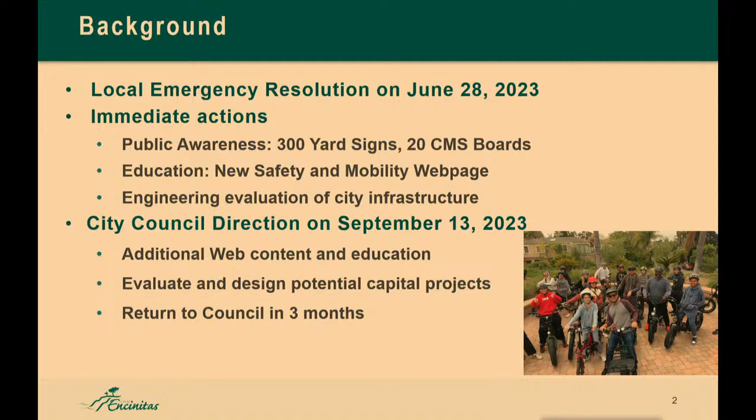In September last year, City Council reviewed what we had done and provided us some new direction: additional web content, evaluating additional capital project options, and gave us 3 months to evaluate these options and do a preliminary design and come to council for potential implementation. This was the list initially presented to City Council, various projects identified when we did a quick sweep of the city's bicycle infrastructure to see what we can do at different locations with different types of improvements. Majority of these are in the vicinity of schools.

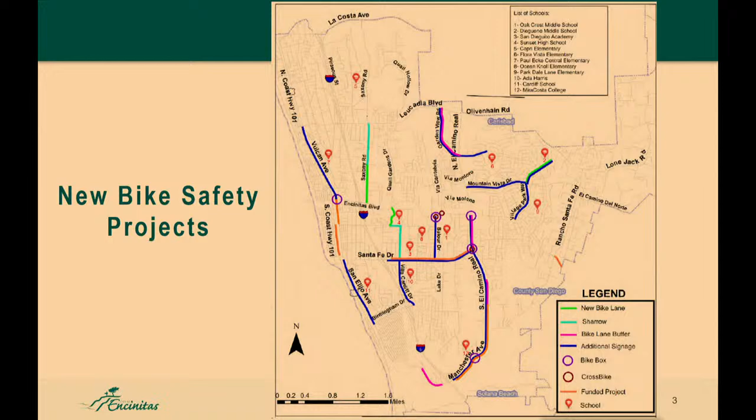Different categories of projects: there were new Class 2 bike lanes identified. There were some streets that had the potential to add new bike lanes, such as Saxony, Westlake, Village Park Way, between the two bounds you can see on the slide. As an example, these were attached to the council report, different designs for each of these roadway segments. A sample, Village Park Way, this is how it looks now—as you can see, very wide travel lanes.

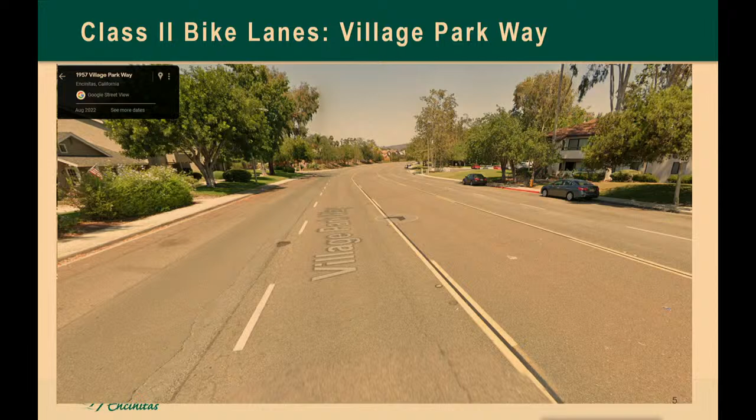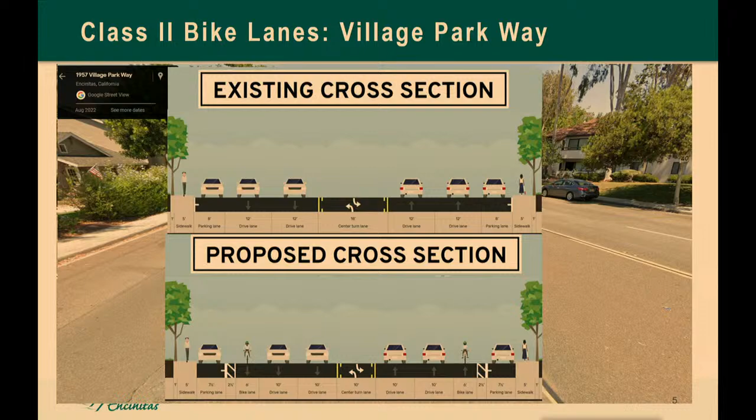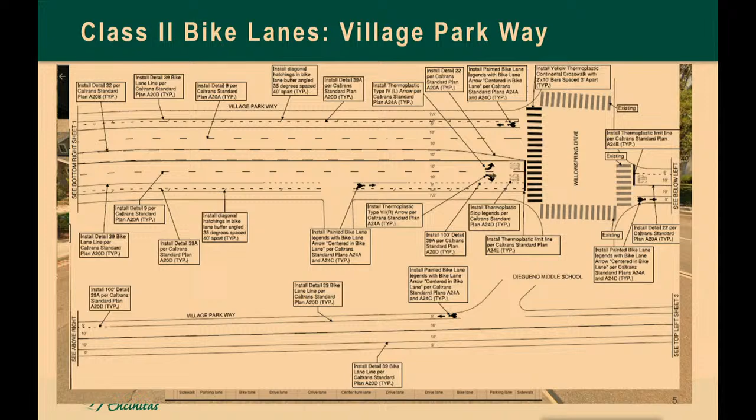When we came to council, we presented a sample cross-section that can narrow down the lanes and add a bike lane and a buffer while still keeping the parking lane. This was blessed, and this is the new design, part of what we will be implementing, obviously pending council approval tonight, and similarly at other locations.

This was another measure we initially proposed to council: a two-stage bike box that would help safer left turns for bicyclists. Locations were identified initially to implement an enhanced left turn for bicyclists—various intersections we thought this could be beneficial to. However, after multiple meetings with Bike Walk Encinitas, and research on examples in other cities and regions, we would like to test this, if council blesses it, at only one location to see how it works out.

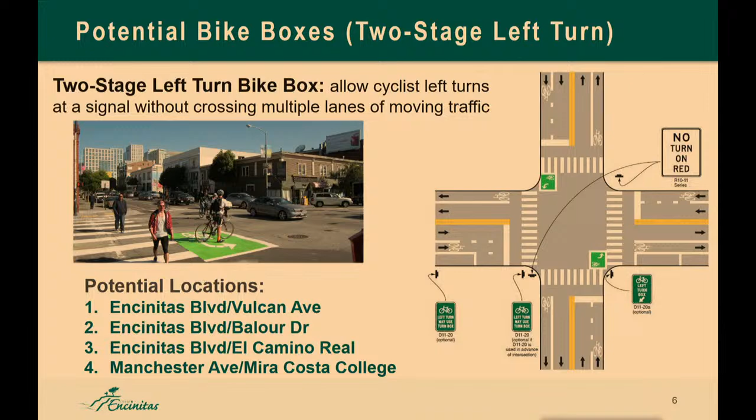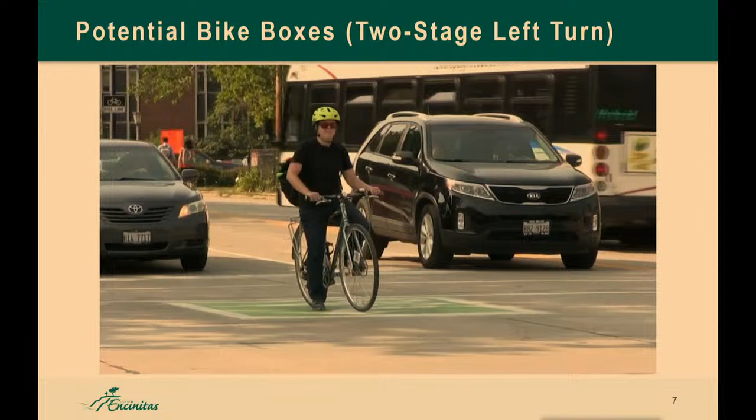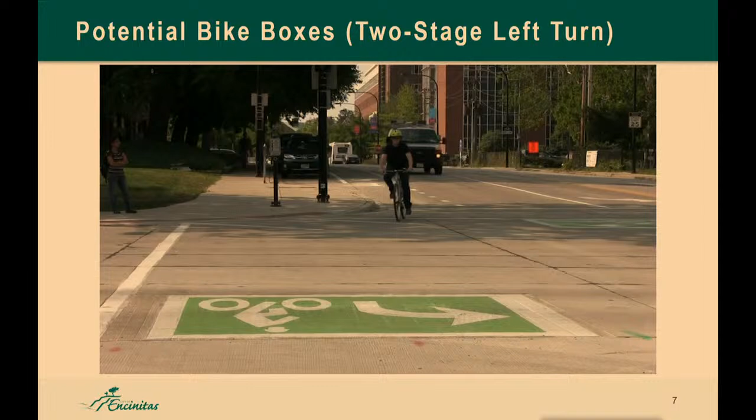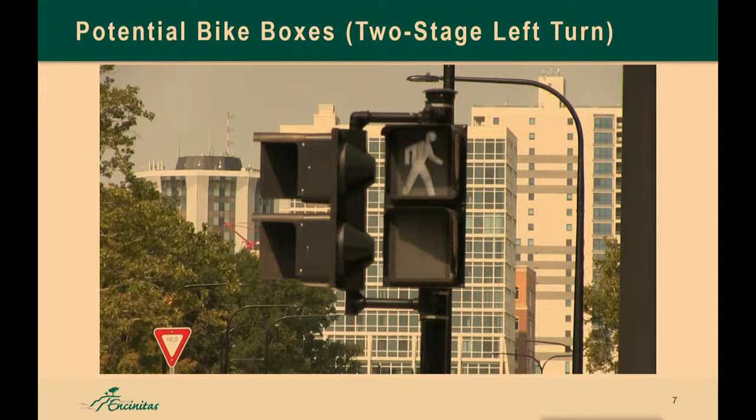A short video shows how these two-stage bike boxes operate. Two-stage left turn boxes provide an easy, safe way for people on bikes to make left turns on busier streets. They are painted green boxes on the pavement where you can wait out of the path of traffic to complete your left turn. To use the box, if you're riding a bike and want to make a left turn, on a green light you should go straight through the intersection and into the box. Turn your bike to the left, then wait for the light to turn green or wait for the all-walk signal and ride through the intersection. If you use the all-walk signal, please be sure to yield to pedestrians.

Two-stage left. The reason it's called two stages: you follow the vehicles with their green, you don't turn left where you intend to go. You continue and cross the intersection. On the other side, you stay on this green box and wait for the vehicles in the opposite direction, then you follow them, parallel to them, to your originally intended direction. That's why it's called two-stage.

Out of the different intersections, there are concerns that have to be mentioned. The most concern is wherever you add a bike box, a two-stage bike box, you have to eliminate the right turn. This is the location that we thought might be a good location for a pilot, Encinitas on Vulcan. This is for northbound left turn bikers.

So if a biker is coming from City Hall, northbound, they get to the intersection and want to turn left toward 101, they would have to cross the intersection, go to the northeast corner with the green for northbound Vulcan. Then they wait here for westbound Encinitas Boulevard, and when westbound Encinitas Boulevard gets its green, they continue going west.

Now what happens is because of the location of this box, the westbound free right turn would be eliminated. So vehicles that are westbound, if this is implemented, there will be a no turn on red for the westbound right turn, which would have some impacts.

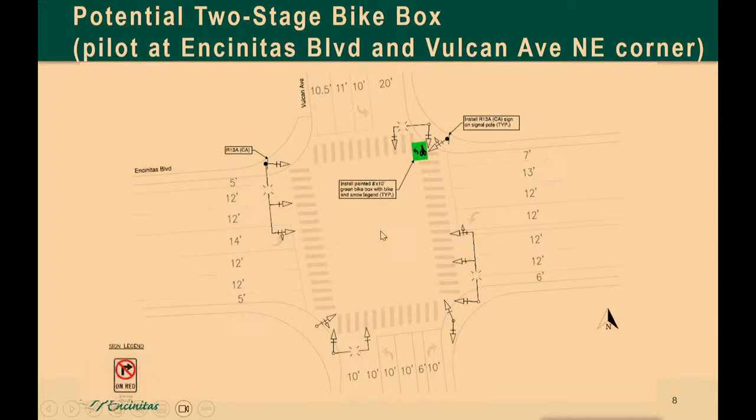So when they're waiting, they are waiting on the pavement in an unprotected area. The design can be made in a way that there's minimal or absolutely no conflict between the vehicles and bicyclists as they're waiting, but any kind of mistake that happens by any bicyclist or a vehicle can put the bicyclist in an unwanted situation.

But as said, this is only one location that we think we can implement a pilot. We are asking council to let us, if it is to be done, leave the other locations for now for a future date.

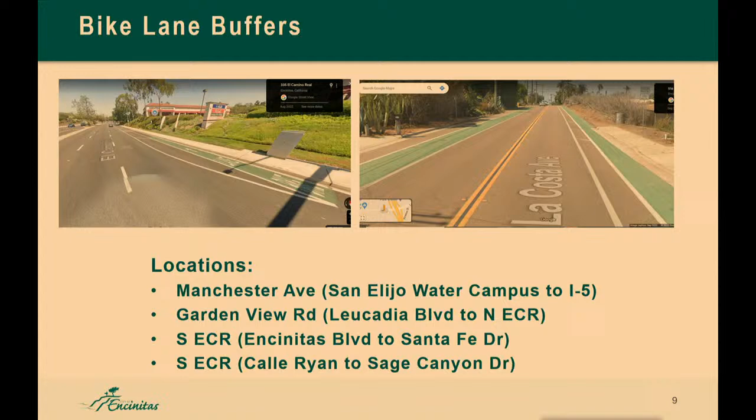Another category of projects: bike lane buffers, simple narrowing down of travel lanes, addition of a buffer where there's just a bike lane now with no existing buffer. Various locations: Manchester, Garden View, El Camino Real. Another example, Garden View right now has relatively wide lanes, bike lane with no buffer.

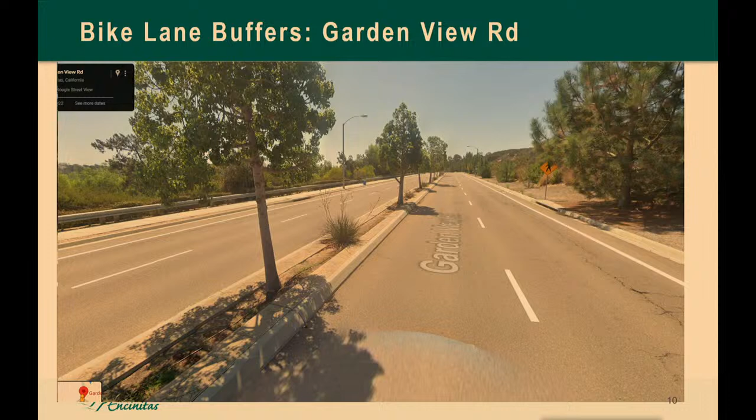We presented this cross section, narrower lanes with a new added buffer, and this is the design that we presented to council. There are similar designs for other roadways too.

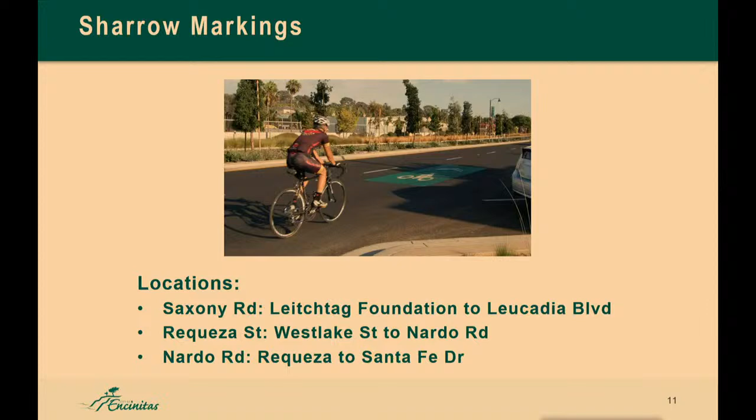Sharrow markings: implementation of sharrows at locations where we don't have enough room to add a dedicated bike lane, but we have enough bicycling activity, or it's in the vicinity of a school or somewhere we felt it can be beneficial to add sharrows. It does meet our sharrow policy, which will be presented to council at a later item tonight.

Bicyclists would have their own dedicated path. They don't need to use the crosswalk, because in a crosswalk they have to walk their bike, but in a cross bike they can just continue riding their bike.

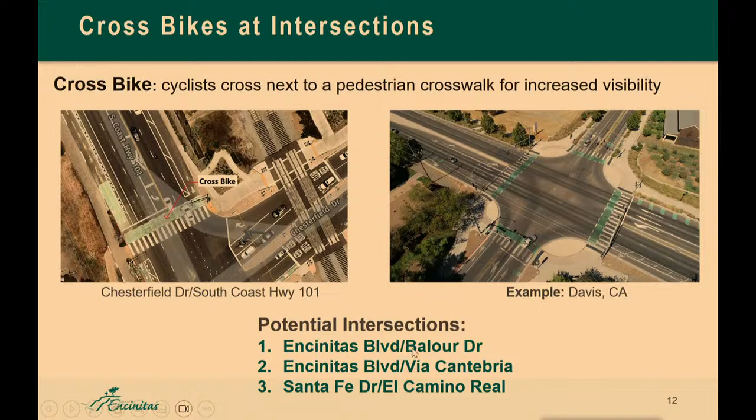Another example on the right in the City of Davis. So these are three locations where we can implement these. This one is another example at the intersection of Balour and westbound Encinitas Boulevard.

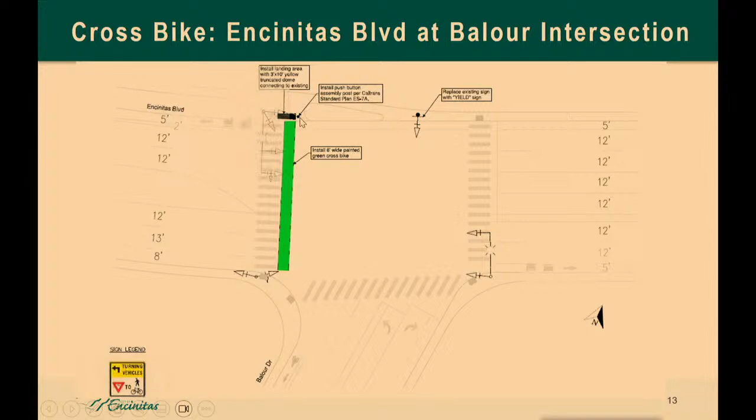If they want to go toward Oakcrest or inside Balour, turn westbound left turn, they'd be able to get out of the travel way. There is a landing area, and a push button for bicyclists.

So this is the existing crosswalk. The cross bike would basically go here, and they'll have a landing. There will be a curb cut on the north side, where they'll wait with a new push button, and they'll be able to cross.

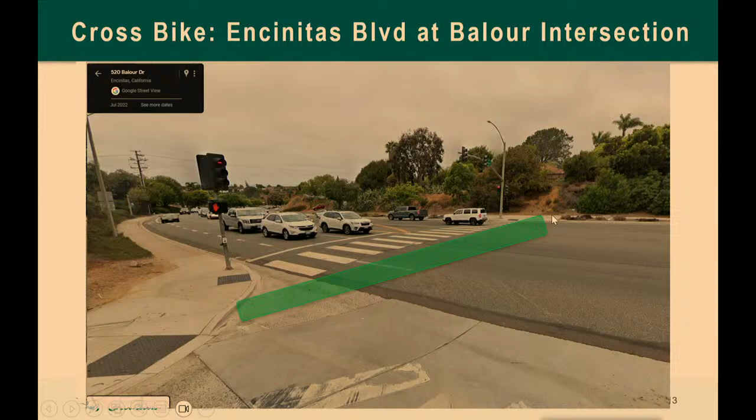Additional signage around the schools, and different roadways that can benefit from additional signage.

It's not very aesthetically pleasing per se, but compared to the slurry option, it's a lot less cost prohibitive, I would say. Slurry, obviously, is a clean slate, a clean canvas - the roadway would look a lot better and will add to the life of the road.

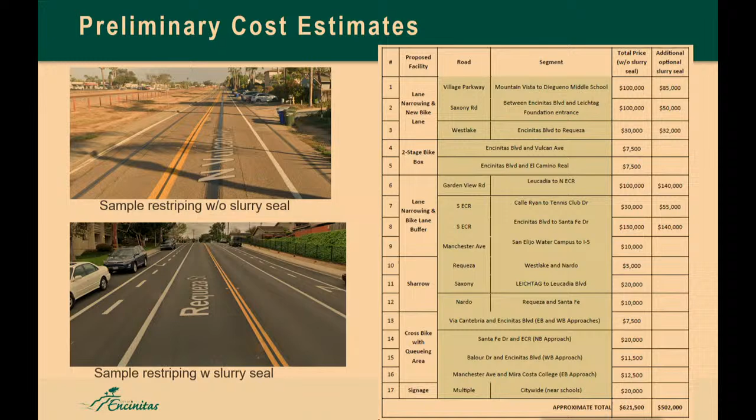One thing that should be noted is that for all these improvements, we will work with our mobility manager to add the educational component that is needed. Many of these - the buffers, people are familiar with what they are, new bike lanes, people know - but there are new features here. If we do the two-stage crossings, the cross bikes, all these additional elements we're introducing, we'll make sure we do as much as we can for our educational campaign, so our students, our residents, everybody basically knows how to utilize these potential new facilities.

Thank you, I'm open to questions. Okay, very good, appreciate the presentation. Does the council have any preliminary questions before we hear from the public?

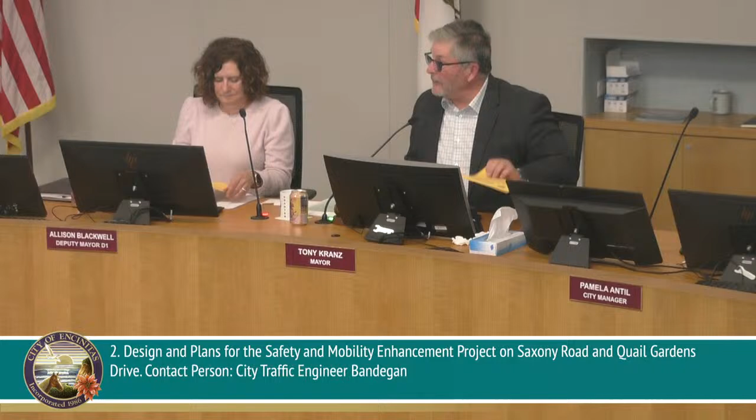And once again, we have our city traffic engineer. Really, this night is all about our city traffic engineer, Abe. Not just me, Mayor, thank you for your support on the previous item. My name was mentioned a few times. I do want to use the opportunity to give a kudos to our staff.

One reason we have the money to do this is that we saved easily $300,000 to $500,000 just for the design. When I mentioned in September that we'll take care of this in-house, everybody was surprised. Obviously, Jill supported us, letting us go a little slower on the other stuff, but our staff, Ian Barr is here, one of our staff, two other engineers of ours, they did a great job designing all of this. If we had to hire a consultant, it would take us three months to hire a consultant, let alone the $500,000 we would have to spend on just design. So smart, they took everything in-house, share that credit. Yes, sir, good job, appreciate everybody.

The second one, safety and mobility enhancements on Quail and Saxony Road. A little bit of history on this. We have various land uses there along these two corridors: residential, recreational, commercial. We have the Y, we have the Ecke Ranch, the medical center. We have future development coming up, mostly on Quail. We received numerous requests from the residents of the two corridors over the past two years for traffic calming and traffic management. We did conduct an analysis and evaluated the two corridors. It was presented to the Mobility and Traffic Safety Commission in April last year. Saxony was presented in June of last year. The fact that City Council's 23-24 strategic planning framework includes prioritization for safety and complete streets on these two corridors, we did decide to bring these to council for future direction.

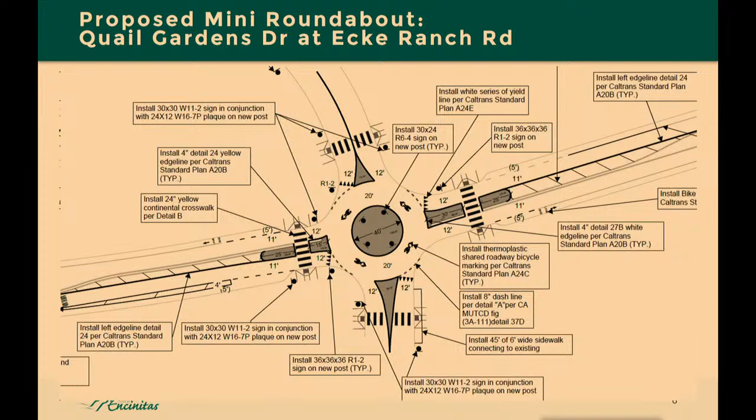Another element was the interim stop sign at the Kristen Court intersection, in anticipation of a future development project building a traffic signal at their main entrance. There are also other options currently under consideration to see if we can fit a mini roundabout here too, to be more consistent along the corridor, but that depends on the development project.

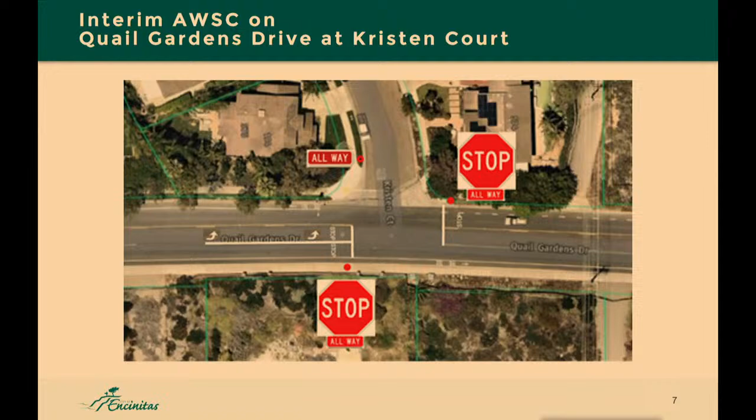At this time, this is a stop sign that was directed by council as an interim measure, and we are implementing it with this project.

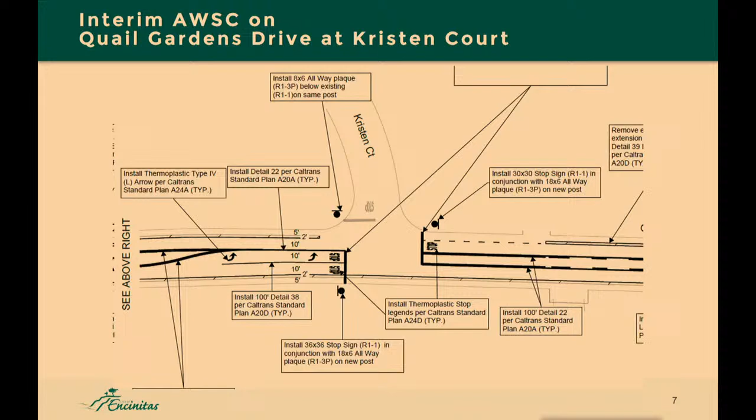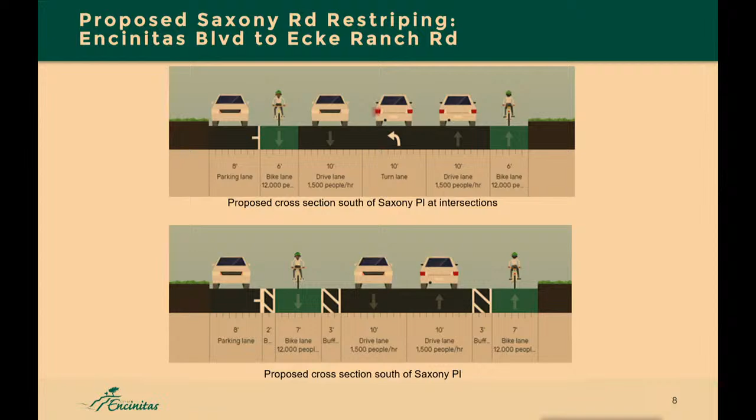As you can see, there are buffers for the bike lane. South of Ecke Ranch Road, by the Y, on Saxony we have a wider cross section with multiple travel lanes and parking. We looked at it objectively to see if we could fit a new bike lane with buffers, and this cross section was supported by council and we were able to implement it within the existing lane width.

This is just one sample right south of the Y entrance. We're adding bike lanes and narrowing down the lanes, adding a pocket to enter the Y.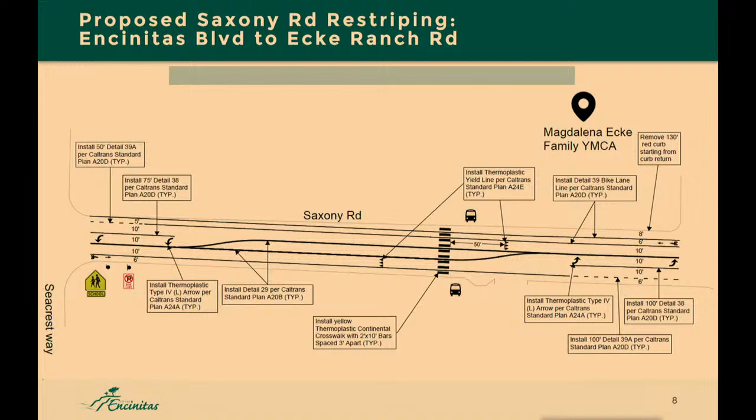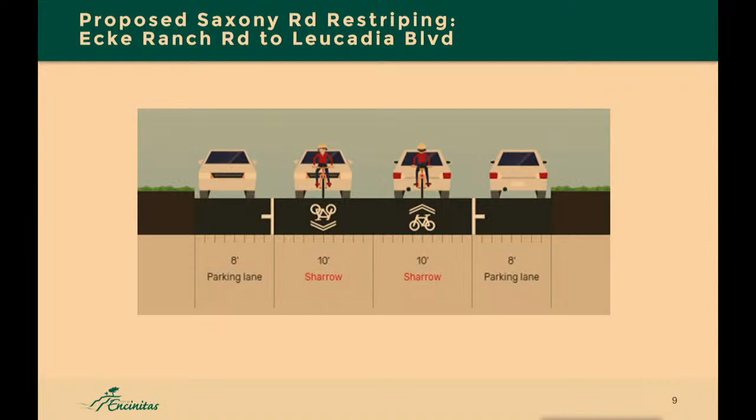North of Ecke Ranch entrance, there is active parking utilization along the corridor in the narrower area of Saxony. At that point, council directed us to go forward with the Sharrow, but to contact the residents who have frontage on Saxony to check how they feel about removal of parking. We sent a letter to all 80-some residents with frontage on Saxony, and only received 10 responses, about half and half - 5 in support, 5 against removal of parking. But because this was the direction from council, we designed it with Sharrows.

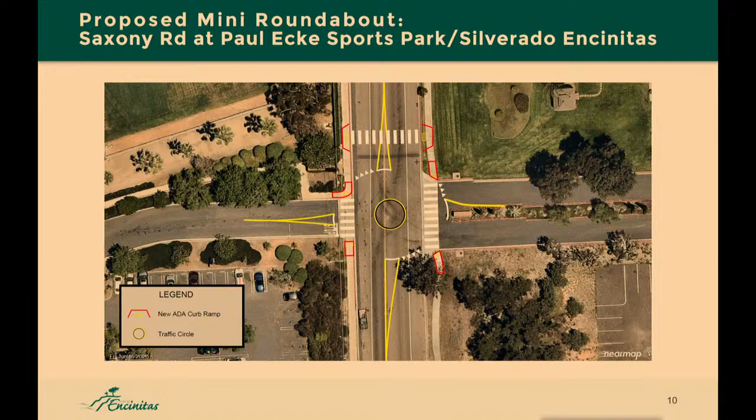We had multiple conversations and meetings with the Y and with representatives of the business on the east side. Due to various concerns, mainly access at peak periods to the Y and also the construction activity the Y is anticipating, we decided to move away from the roundabout and replace this traffic calming idea with chicanes. We have something similar in the Cardiff area, but not exactly this. This is a new design that council did not see in September, but it is supported by the Y and the residents, and the business on the east side, between Saxony Place and the entrance to the Y.

So we're deflecting the pavement, the roadway, the travel lane, in a way that vehicles would have to kind of meander in the roadway, and this will have a considerable traffic calming effect on them.

The two small gray lines you see here represent a future access point by Y. It hasn't yet been implemented, but Y will be working on it. This design will also allow this future intersection to be implemented while keeping the chicane in place. We talked to Y, checked their designs, and we're optimistic this will have minimal change when that future Y access is opened on Saxony. But in advance of the Y entrance, we'll have good traffic calming with this design.

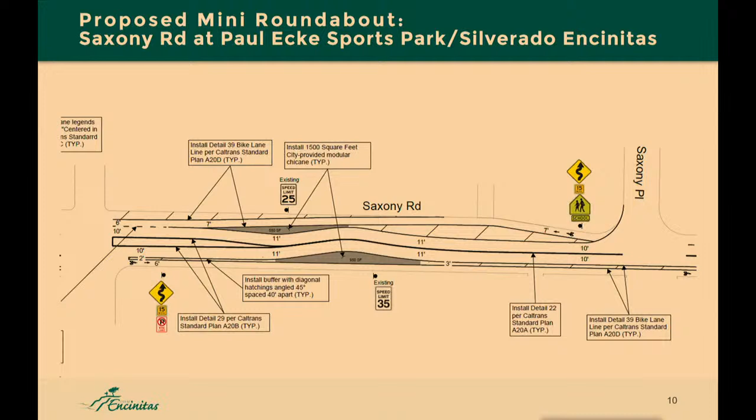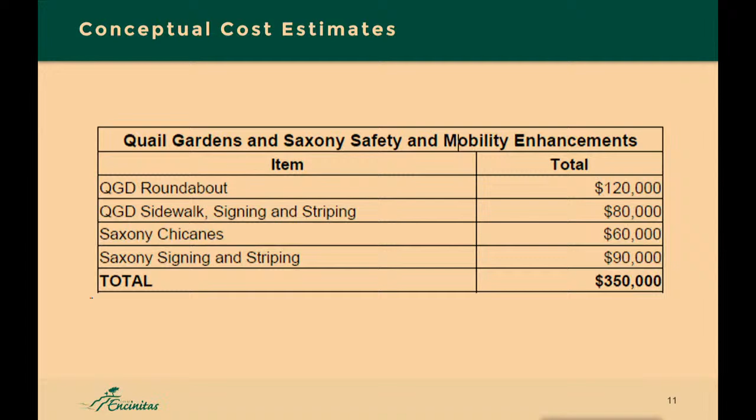The cost estimate for this is a little higher than originally anticipated. We're looking at $350,000. But again, with basically all of the funding we have available in our different accounts, we should be able to cover this, assuming the bids come out at or close to this number. Thank you, I'm open to questions, Mayor.

Okay, thank you. Do we have any public speakers? We do, we have several. Are there any preliminary questions from council? Seeing none, we will go to the public for comment. Our first three speakers are Glenn Johnson, Dick Stern, and then Jim Farley.

Okay, we're live. Good. First of all, Happy New Year to the council, the mayor, to Bruce, and to the staff members. Now we can get some things done. There's been quite a bit of studies and work on this by staff, public, and commission, and this plan is really, I think, a great plan. There's been a lot of compromises, and probably after the council gets through it, there may be more.

Just a reminder, the big issue here, especially on Quail Gardens Drive, is the traffic volume and speed. It makes it difficult to get in and out. My street is Kristen Court, and it makes it difficult to get in and out, especially during rush hour. So the volume and speed of traffic needs to be examined.

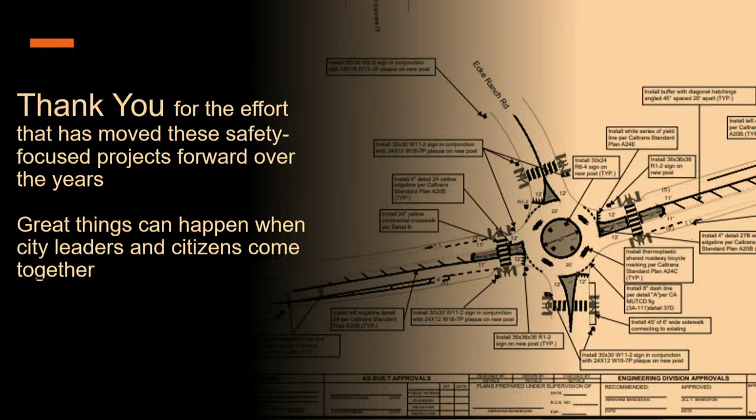Good evening, City Council, Mayor. Thank you for the effort that has moved these safety-focused projects forward over the years. Great things can truly happen when city leaders and citizens come together. Our city engineering staff has a difficult role to play. They have to address resident safety, business needs, and the vision of the City Council while providing the best solutions within the parameters and rules of Caltrans. This is not easily done.

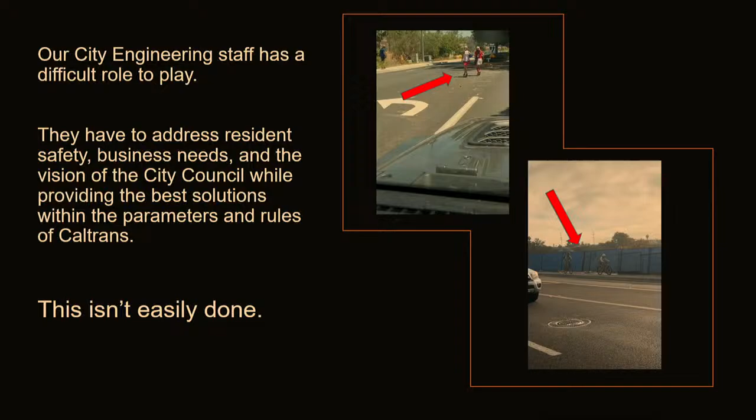So our traffic engineering team got feedback from every angle, as has been discussed tonight. I was with Mr. Bandegan out on Quail Gardens Drive, thoughtfully assessing things, and I really appreciated the time that he took. I believe they have achieved an outstanding solution, as these designs thoughtfully consider all parties. The designs equally address the needs of the motorist, the bicyclist, and the pedestrian alike.

These plans enable safe egress and ingress into neighborhoods, as was mentioned earlier. It has been dangerous, scary oftentimes, going just in and out of Encinitas Ranch, Channel Islands, and the various neighborhoods. And these two stop signs and roundabout absolutely address that thoughtfully.

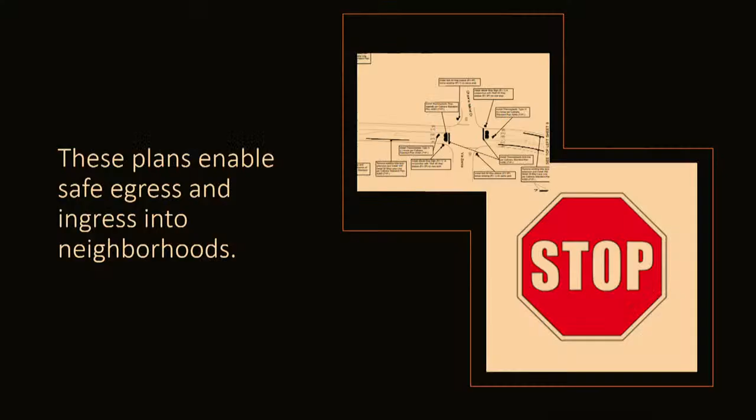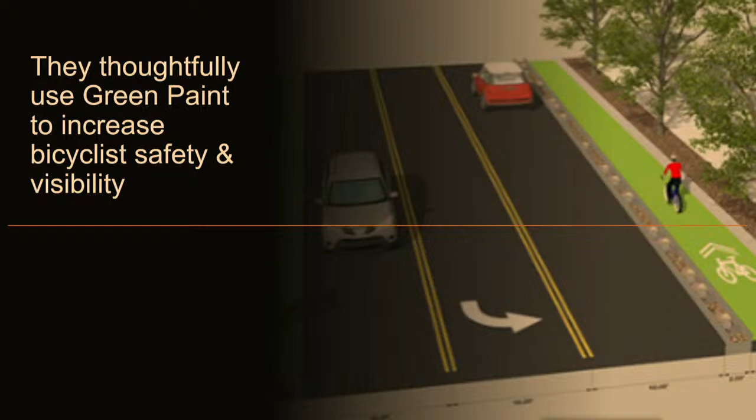They thoughtfully use some green paint, which I just love. As a motorist, I love it. It always makes me aware. It makes me stop and pause, check my mirror—is there a bicyclist? Every single time, every day, day and night. I think it's brilliant. The more green paint we opt to use, the better. So I was really happy to see some green paint incorporated in these designs.

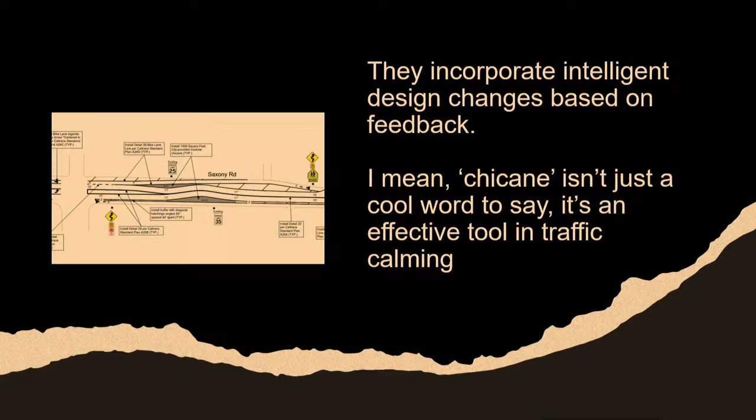These designs also incorporate intelligent design changes based on feedback. I like that there was initially going to be a roundabout on Saxony, and it changed based on feedback. And the word chicane isn't just a cool word to say—it's an effective tool in traffic calming. After all, they work on the Charlotte Motor Speedway. Let's let that sink in for just a second. Chicanes work.

So in a world where everyone's in a hurry, these designs that have been thoughtfully presented encourage vehicles to slow down. Slower cars can see kids, slower cars can see bicyclists, slower cars have more time to react. Slower cars save lives. And isn't saving lives a great thing to be doing as a city council?

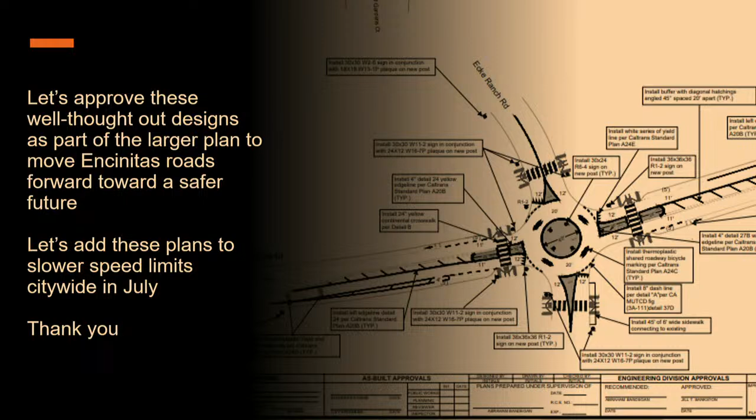So let's approve these well-thought-out designs tonight as part of the larger plan to move Encinitas roads forward toward a safer future. Let's add these plans to the slower speed limits that hopefully are rolled out citywide in July. Thank you again for all the time, effort, for listening, working with the public, and thank you again to Mr. Bandegan and his team.

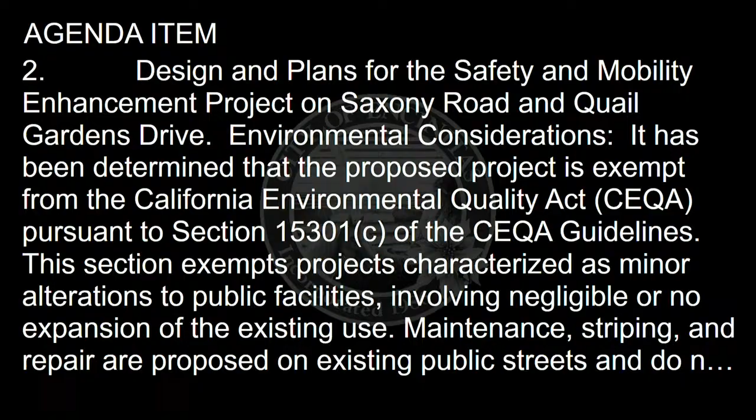I feel like I'm learning a lot from all these people presenting, so thank you to the audience. I'm going to be really quick and short. I really like this project. In general, I really support traffic calming, slower speeds, more protected, separated bike lanes. So obviously, in the long term, the more protection, the separation, the better.

I happen to go to the YMCA three times a week, so I actually know that area really well. I live in Cardiff. I used to live on Summit where the chicane was—that's kind of nice, so I'm excited to see that chicane. I'm really excited to see this. Obviously, I'm more excited about the bike lanes and the sharrows, but basically, big thank you to council and staff for all this work. I support this.

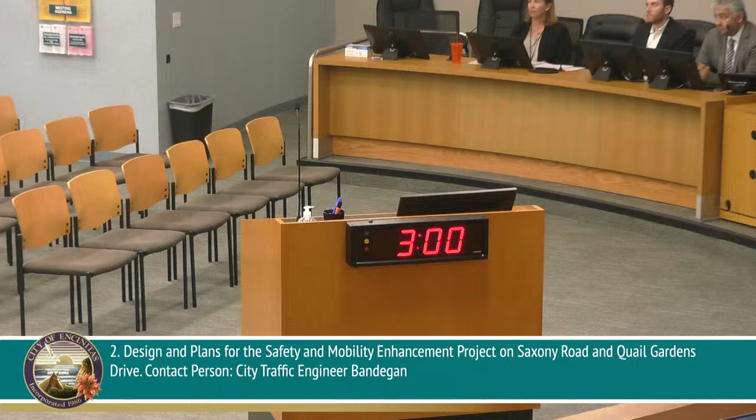Christine Schindler, East Encinitas. I guess I should also say Happy New Year, so I didn't start with that last time. So a lot of positive remarks. I think I'm just going to add to them and maybe make a couple of mentions.

Looking at Quail Gardens first, I absolutely love that there's going to be a roundabout. I saw in the comments that were submitted that it's got the full support of E3, Encinitas Union School District, Farm Lab, San Diego Botanical Gardens. I want to echo what people have said already about city staff interacting with all the key stakeholders and residents and businesses on the corridors. So that's been well done and certainly appreciated.

I do want to say, as far as the roundabout goes, having sharrows that feed into the roundabout—I don't think I saw that on the design—but that's important so that people can transition out of a bike lane into the middle of the travel lane well ahead of going into the roundabout, especially from the south and the north where most of the traffic's coming from. So if it's not already there, I would recommend those being added.

On Saxony, I agree with Aaron Hebshaw that if we can take parking out—and it sounds like it's probably on the west side of the road, as you go north, getting close to Leucadia Boulevard—certainly want that to be able to continue the bike lanes and not use sharrows if possible. So would encourage the City Council to support that and for staff to look into that further.

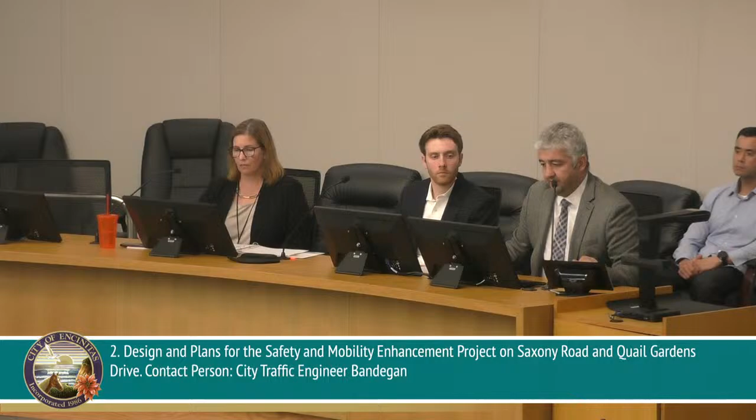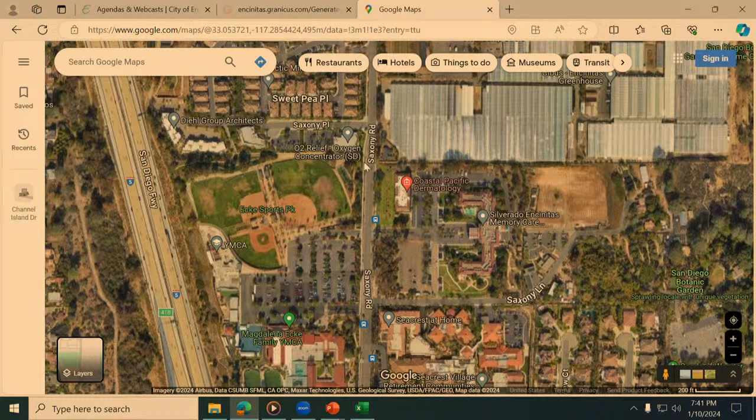So, from what I recall, the modification would be in this area, north of the parking lot. This area, right south of Saxony Place, there will be a new access connecting to Saxony, basically the northern end of the lot, and this is where our chicane would start.

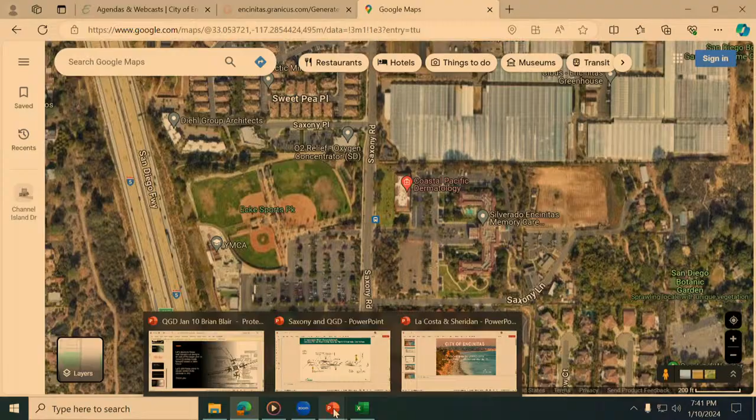Going back to the presentation, this is Saxony Place, so that future access is somewhere around here. We did receive the design from the Y team, and I think this is where it's going to line up in the future, or somewhere around here. I think you're right, yes.

As you can see, we have this wide crosshatch area here for the entrance of a new future road. We can modify this crosshatch to form a minor T intersection here, so that vehicles can turn left in, or turn right out, or turn left out.

We had to kind of shift it. As you can see, the two chicanes don't look exactly identical. Initially, they were closer to Saxony Place, so both of these were the same size, but in anticipation of this coming, we had to push this a little bit toward south so that this future access will work with the existing, or future existing, chicanes.

Awesome, thank you. Thank you for coordinating with them on that, and I know their plans may not be complete yet, so it sounds like there's some flexibility there to work with them in the future. And I did have another question.

Just another comment. I know that in the future we're going to be looking at the costs of connecting pedestrian access along Quail Garden Drive, on the west side of the road, south along the property, along the Botanical Gardens property. So I look forward to complementing what we're doing here by making that connection and continuity for pedestrians in this area too. I know it's another item, but I see it as complementary to improving the safety along this corridor. We're still assessing the cost of that, and we'll make decisions, and that will come before us sometime in the near future. That's it for me.

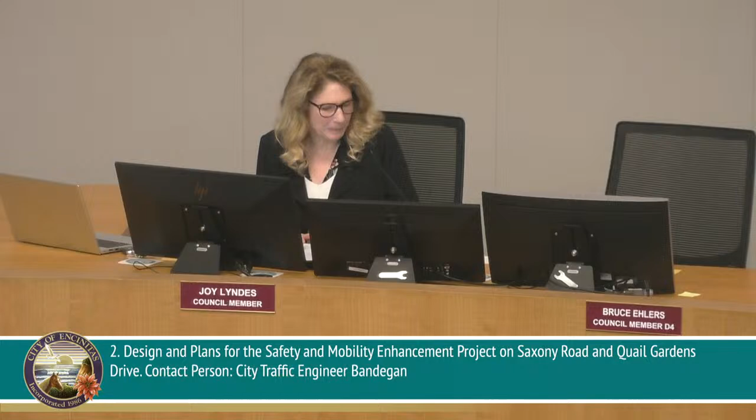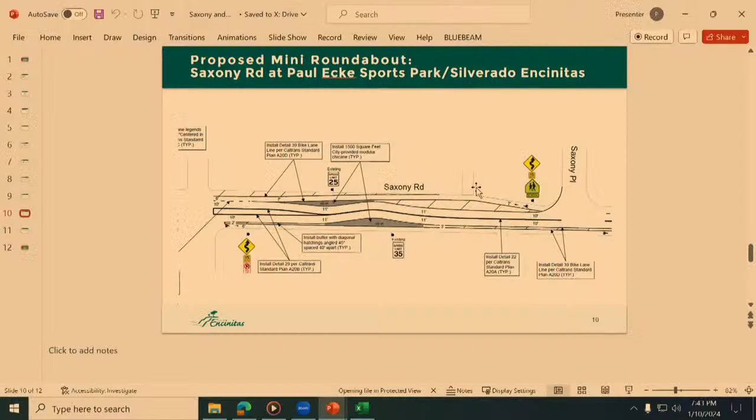Okay, thank you. And this is going to be the entrance to a new parking lot around those sports fields, right? So that particular new entrance is likely to be busy at end of games, start of games, things like that. So it's important that we accommodate, and I appreciate the work that you did with the YMCA, because we did hear from them once they got wind of the roundabout. So thanks for working with them.

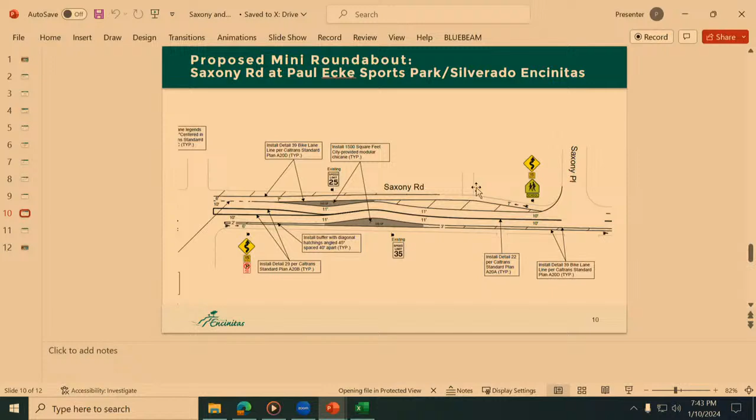Councilmember Ehlers. Okay, I appreciate it. Thank you. I'd also like to thank Jill, Abe, and the team for getting this done in-house and quickly. I appreciate it both because of the cost savings, but also because of the time savings. And I also like it because it makes our staff the expert in exactly the kind of change that will be needed as we modify, just as we were talking about here for the YMCA extra parking entrance, or for changing the parking/bike lane configuration on the north end of Saxony.

So that's great. I want to double down on the comment about the chicane. My favorite author is Mark Twain, and he says, if your only tool is a hammer, everything begins to look like a nail. Some days I felt like we use roundabouts that way, and to see a roundabout replaced with, I think, a more appropriate chicane, wonderful.

So thank you. I would be interested in where we are using the sharrows. Michael von Neumann's comment about bikes may use full lane on the pavement - I like that, I think that is very appropriate. In fact, I like it better than having signs saying that, because often I feel like as we put more and more signs up, they're losing their effectiveness. But I agree we want to make it very clear to the drivers, all drivers, whether they live in the area or whether they're new to the area, that the bicycle in a sharrow situation may use the full area.

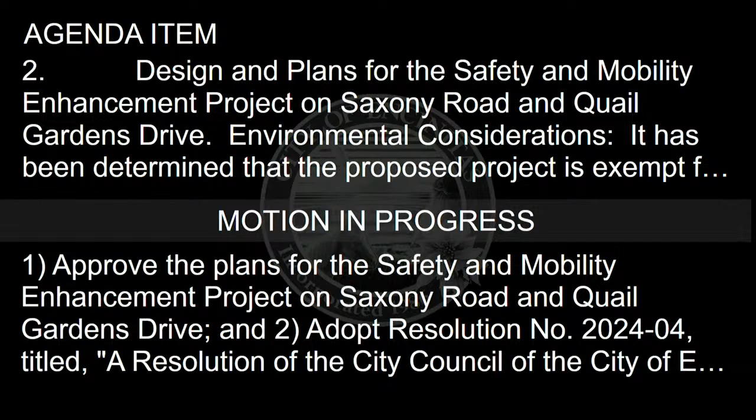Thank you, Deputy Mayor Blackwell. Yeah, I'll keep it brief. I think I would echo everyone by going last in the chain, you sometimes get all your questions answered and all the comments made. I'm really supportive moving forward. It's time. It's taken a lot of work from 2014 all the way to get here. And so I appreciate the community and city partnership and all the work traffic engineering did. So let's go.

Thank you. Yes, it is, in my opinion, well past time. I've been here 11 years, and we've been talking about this for way too long. The Leichtag Foundation did generously provide the consultant for many of these ideas, although I think a lot of that has been modified a bit by our own staff and public input. And so I think, to many of the comments, the open government process that we've seen in this is commendable. So thank you all, the public and staff. It's good to get to this point where we are actually taking some concrete steps, no pun intended.

So I think with that, we have a motion and a second, and we're ready to vote. It was staff recommendation with the addition of the bicycles may use full lane markings in the sharrows, as well as the bike lane transition to sharrows striping on Saxony.

If I may, can you change that to proper sharrow marking? Just recently, the national MUTCD changed, giving more strength to the bicyclists. The bicyclists may use full lane now is bicyclists are allowed to use full lane, to notify the drivers that it's not a may, they are allowed to use it. And we don't spell out bicyclists, we say bikes, right? Isn't that how we do it on that sign? I think we just use the sharrow logo instead, because bicycle is a big word, doesn't fit in the lane. We're just using the sharrow marking, a bicycle, and then say may use full lane, but it will be changed to allow. Yeah, it's not yet in effect, but I want to make sure I'm using the right term. So we're just adding proper sharrow marking.

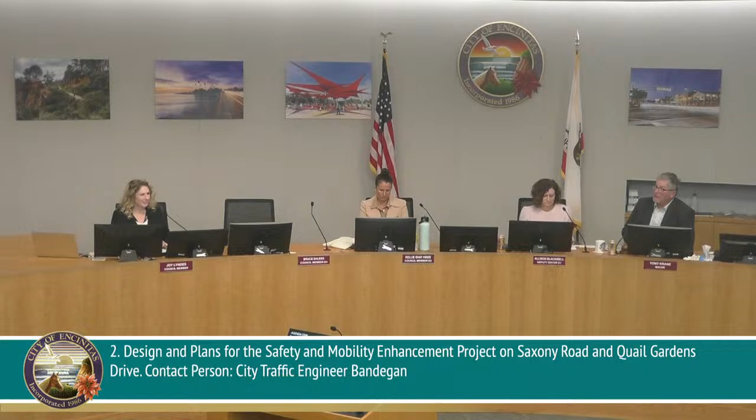Okay, appreciate your advocacy, all of you. So with that, we will move on to item number 3, which is the designation of the intersection control at La Costa Avenue and Sheridan Road as an all-way stop control. This is something that was on the back burner for a while, and we got it off the back burner, and it is now here. I don't know if you have a presentation, Abe? Yes.

Thank you, Mayor. The next item, the all-way stop control at the intersection of La Costa Avenue and Sheridan Road. Quick background.

In 2018-2019, the Mobility and Traffic Safety Commission and Council received concerns from residents about this intersection, turning left in, turning left out, and generally the speed of traffic on La Costa during off-peak periods and how it's not convenient and comfortable getting out of Sheridan or getting into Sheridan at this location.

In 2020 and 2021, we evaluated multiple traffic control options, not only at this intersection but at multiple locations along La Costa, including La Costa and Vulcan. We also hired a consultant in 2021 to take a more holistic look at the corridor. The consultant evaluated the corridor in length, with different traffic control options.

I do have that presentation on those slides if Council wants to look at it again. They evaluated mini roundabouts at Vulcan and Sheridan intersections, a traffic signal, and addition of a two-way left turn lane. They evaluated multiple options along the corridor. We provided their findings to Council in November 2022.

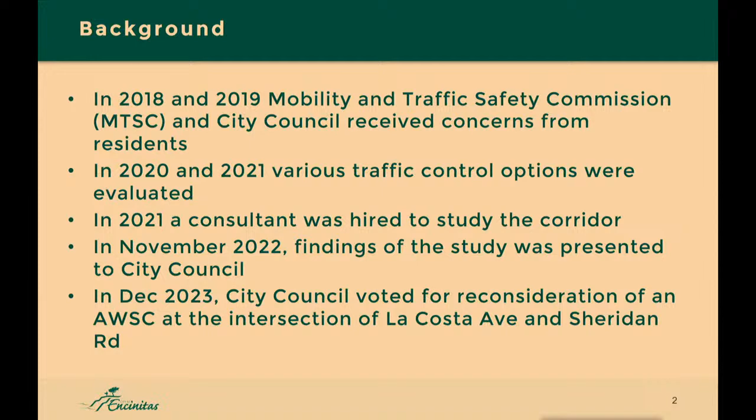There was, at that point, a suggestion from City Council to look at a possibility of an all-way stop control at the Sheridan intersection. That item was tabled in December of 2022. However, last month, Council voted to reconsider that all-way stop, and now we're here tonight to take a new look at this intersection.

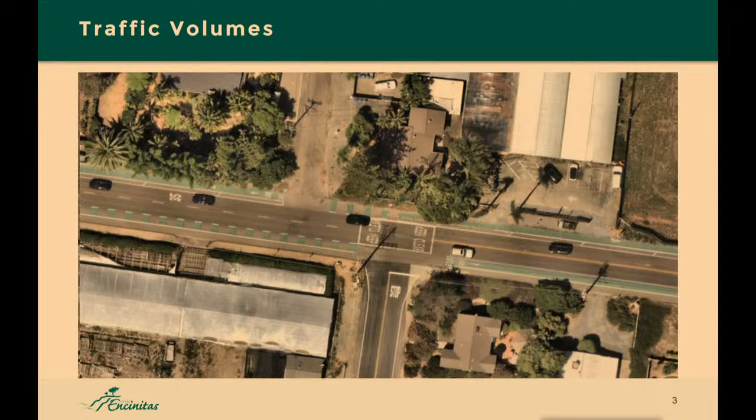Aerial view at this location, as you can see, we have bike lanes in both directions, two narrow travel lanes, and a pedestrian walkway area on the surface.

An all-way stop is feasible. The volume is not that high. Box number 3 on the bottom right shows the volume of traffic during peak morning and peak afternoon. The first number before the slash is peak morning, the second number after the slash is peak afternoon.

As you can see, the left in is about 43, 42 during morning and afternoon per hour, less than one per minute I guess. And then the left out is even smaller - we have 9 in the peak morning and 14 in the peak afternoon. Obviously the right out can't be a matter of concern if it's lower volume.

During off-peak period on La Costa, speeds can be a little higher, but the collision history didn't show that much - not that many rear ends or anything that would justify additional measures here.

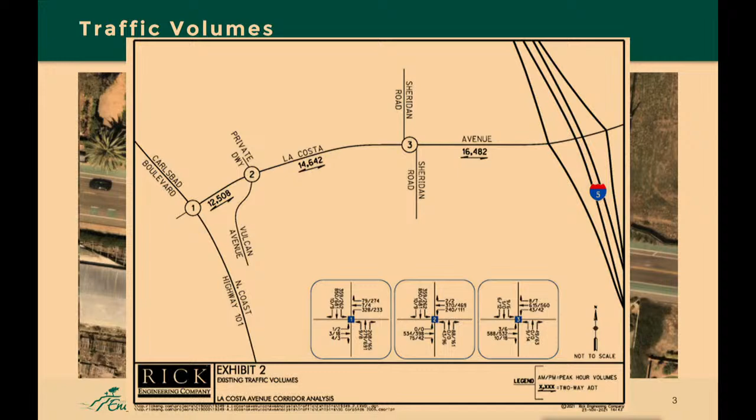Per direction of City Council, we have designed an all-way stop control here, similar to the Vulcan stop sign, where we implemented it the first few months. We had, not frequent, but a good concerning number of residents who weren't stopping at the stop sign where we first implemented the Vulcan stop sign. So after a few months, I think 2 or 3 months, we ended up adding blinking stop signs. We didn't want to take the same trial and error approach.

We are recommending, if this is approved by Council, starting with the blinking stop sign, and after a couple of months we can remove it and then evaluate to see if anything changes. But for the first few months, we think it's good to at least start with the blinking stop sign. Everything else is pretty much standard: a stop bar, a stop legend, and everything.

This is just it, so this is for Council to decide if we're proceeding with this. Thank you, I'm open to questions.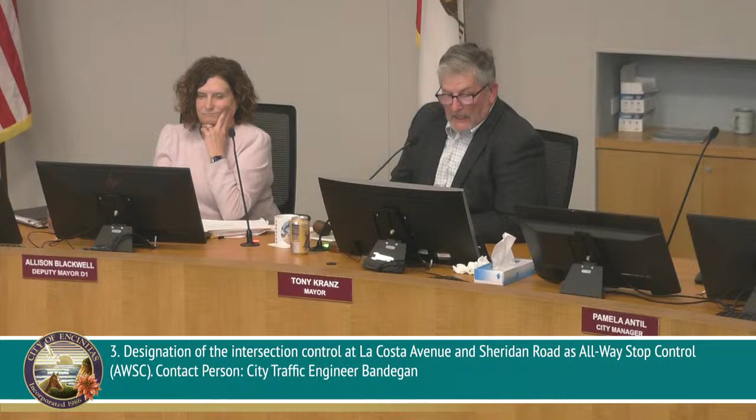Thank you. And I've been a strong advocate for an interim all-way stop control at this intersection for quite some time, and I want to emphasize the word interim. I do think that this is an example of a nail. This and the Vulcan intersection with La Costa Avenue are nails, and like Mark Twain said, the hammer of the roundabout should be brought down on these nails. So I am a strong believer in roundabouts in these intersections.

Did I lose you on that? I did. Okay, well, Bruce got it, I think, but in the meantime, yeah.

I am a hammer guy with the roundabouts. I have not seen a traffic problem that I didn't think could be solved with a roundabout. But in this particular case, we've got traffic issues, we've got speeding issues that really, to me, don't allow us to wait to be able to put in a roundabout. So this interim step is important.

I have a business client that I drive to their office regularly in Carlsbad, and so I use this route. Yesterday, I was at a one-way stop. I was westbound on La Costa Avenue, and there was someone that wanted to turn left onto Sheridan. So there were about 20 cars backed up waiting for that left turner because there were about 20 cars going eastbound on La Costa Avenue. And that inability to meter that traffic is causing backups all over.

And so to me, it is about creating a regular interval. Everybody stops, everybody. Now I get that sometimes traffic won't be there, and so you have cars that are stopping for no reason at all. That's one of the things that contributes to people running the stop sign, is that they don't see any reason why they should stop, and so they just keep going. I get all of that.

But when it comes to busy times, when there is a lot of traffic, people taking their lives in their hands to turn left, to go west from Sheridan onto La Costa Avenue, I felt bad for the person that was waiting there to do that when I finally got to go continue straight, because not only did they have to wait for all the eastbound traffic, but then once the left turn onto Sheridan and all the westbound traffic, they had to just wait. Whereas if you have like Vulcan and La Costa Avenue, just that constant meter, that constant flow, I think it works as an interim solution. So I have been a strong advocate for implementing that particular tool.

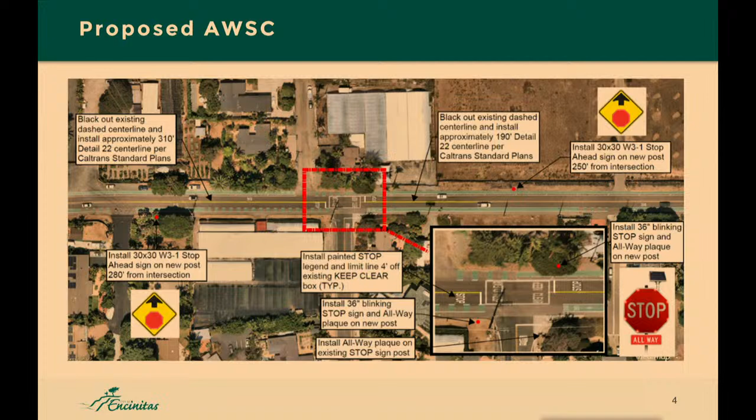Okay, great. Well, in sum, I think this is important for us to do now, but look longer term and have a better plan. It was pointed out to me by Paul Rodino that La Costa, there are several connecting roads between I-5, Vulcan, and San Leo, and La Costa is the only one that really doesn't have a lot of speed control, traffic mitigation, even sidewalks—it's just been kind of left behind. But with the volume of residents moving in there, that road's going to get busier, and we need to do more. So I'll yield.

Councilmember Lyndes: Thank you. Just a few things to echo what Deputy Mayor Blackwell and our mayor are saying. We've given a lot of time and thought to improvements along La Costa—a lot of community input, our engineering staff, our planning, and city council. We've heard a lot over the years, and yet we feel some reluctance to try something. It's almost become painful that we're not moving something forward, because safety is so important to the community. I think we all feel the safety along La Costa is imperative to improve, and I don't want to delay any longer—to take a small step forward to improve the safety along La Costa. So I enthusiastically want to support and move to support the staff's recommendation for this action.

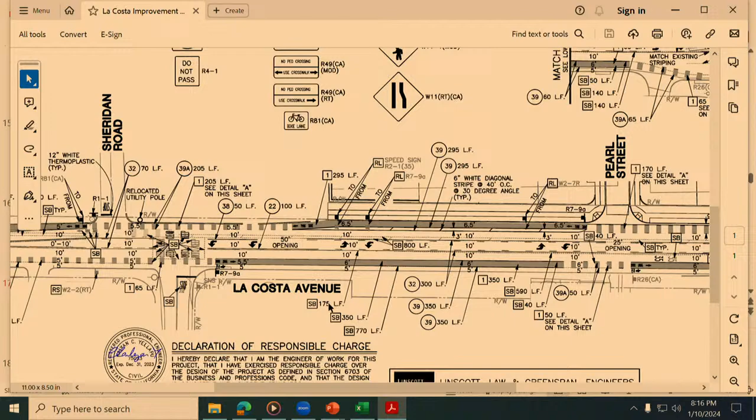Now, to answer your question, Councilmember Ehlers, we have to know what our ultimate cross-section is to design a roundabout if we're going to build a future roundabout here. At this time, we do have different preliminary options from the consultant who did this study last year.

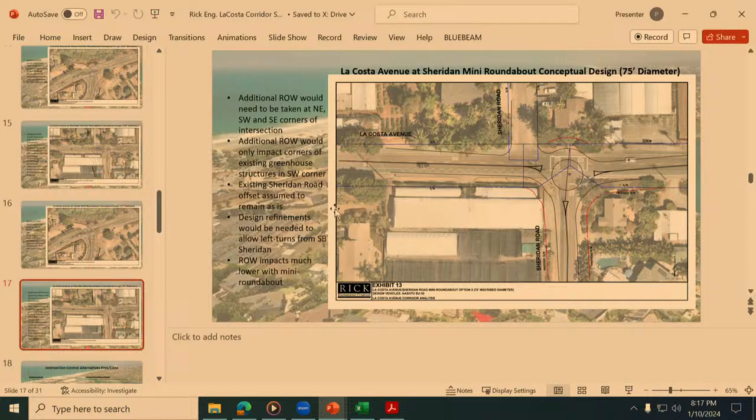We have two options. This one is a 75-footer. You can see there is some right-of-way acquisition required on the southwest corner, and then a realignment of the road. We need some on the southeast side. This is preliminary, and this is a very small mini roundabout, smaller than El Portal even.

And there's another version, closer to El Portal. You can see to build something like this, pretty much a third of the property on the southwest would disappear, and also some on the north side. To give you an idea, this is 105 feet diameter exterior. El Portal is about 100, so this is pretty much the same footprint, but to build something like this, design is the easiest part.

We have to obviously have the right-of-way. We have to have the ultimate cross-section of La Costa working for us, because we cannot have a one-laner La Costa coming to something like this. It wouldn't work.

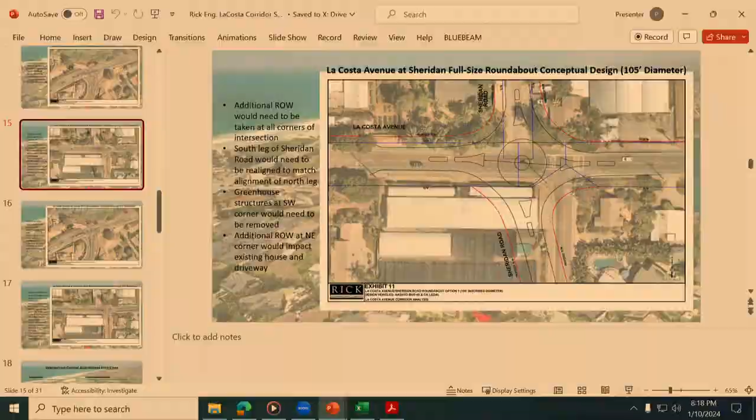So if the developer came in, let's talk on that southwest corner here with what you're showing. If a developer came in to do a project, and typically the planning department has the ability to require dedicated right-of-way based on existing roadway plans, would we be in a position today to demand some dedication, maybe not as much as what you're showing right now, but to get maybe the smaller or somewhere in between?

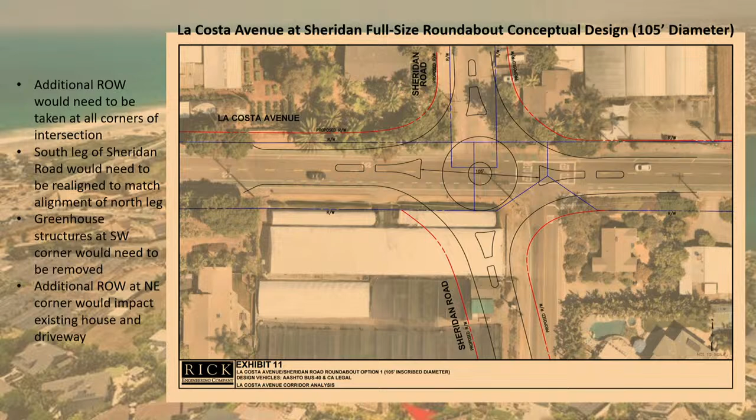My question is, do we need to take additional action? I'm all for approving the stop sign tonight, getting the safety first, but I'm trying to make sure we also take the second step, putting ourselves in place so that when these two developments go through the planning process, the planning department in conjunction with engineering has the ability to require dedication of street right-of-way. Maybe not like La Costa 48, which has a lot of extra lanes over there, but at least enough to accommodate a traffic circle.

And what I like about what you're showing right now, even though it takes a lot of land from the southwest, I like the fact that the traffic circle helps to mitigate the misalignment of North Sheridan and South Sheridan. It would make it much better. This is exactly the type of place where a circle is almost perfect, because you have that 15 to 25 foot offset between the two alignments.

So what do we have to do? Councilmember Ehlers, how about if this agenda item is about the all-way stop control, and you're raising some really good questions - I think we should be having this conversation about the entire length of La Costa Avenue from Highway 101 to Interstate 5, with as much information about future development, current development, and what there's room for. So how about we defer that to a fairly near meeting on that particular topic.

Okay, and the only reason I was asking is if we had something as simple as putting in the resolution that this is the interim solution, and that the ultimate solution would be we would investigate looking into that - would that give us enough? Maybe that's the question I should have asked, simpler. Yeah, I don't have any problem putting it in the motion. We don't have a motion at this time. Oh wait, yes, Councilmember moved. Lyndes did move, so we could modify the motion perhaps, and you could second it. But there has been a lot of talk about La Costa Avenue - we've talked too long.

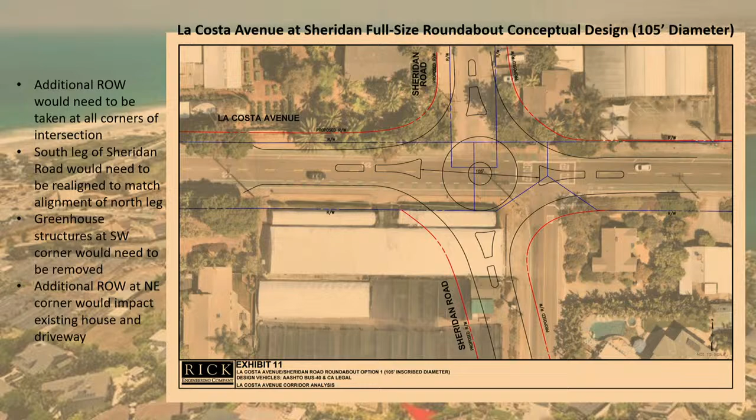Okay, so I'll second the motion if you don't have a second. And what was the friendly amendment? I forget now. That this is an interim solution. Yeah, interim. That this is an interim solution. Thank you, I'll accept that friendly amendment. Did you have anything more that you wanted to add? No, I'll yield.

All right, Councilmember Hinze. Thank you, I just wanted to bring up the question that Tom asked about a crosswalk. Is there the possibility to get a crosswalk at least east-west? Oh yes, we should be able to add a crosswalk. We usually don't do crosswalks at our stop control intersection, but obviously this road being a classified high-speed road, we can certainly do it more along La Costa.

I guess because Sheridan, everybody's familiar with the stop sign on Sheridan, and they do stop mostly. But the reason we didn't add it here is the same concern of this being new—we didn't want to create a false sense of security for pedestrians crossing La Costa right after we post a stop sign and somebody's not familiar. We can certainly go back very soon after and add crosswalks on La Costa too. So it'd be a separate project to add a crosswalk? Yeah, we can add that. The design does allow for crosswalks on La Costa. It's just we didn't show it on the plan right now because, again, with a new stop sign, people might miss it. So give folks a chance to learn about the stop sign first, and then add the crosswalk.

Okay, I'm fine with that. Thank you.

And I would add also, this issue of the mobility element, circulation element has been a real problem. I did get an update that the EIR draft is going to be out in a few months, and it's looking like council will be considering the proposed modifications to the circulation/mobility element probably in the fall. So the only way we can really take steps to determine what kind of road configuration this stretch will have is after we have finalized the mobility element. I will add that while this council has generally unanimously supported changing the 4-lane designation to 2-lane, my understanding is that Carlsbad has some problems with that. So there may need to be some creative work done and collaboration with the city of Carlsbad to make sure that we're able to design this stretch of road the way that this community wants it to be.

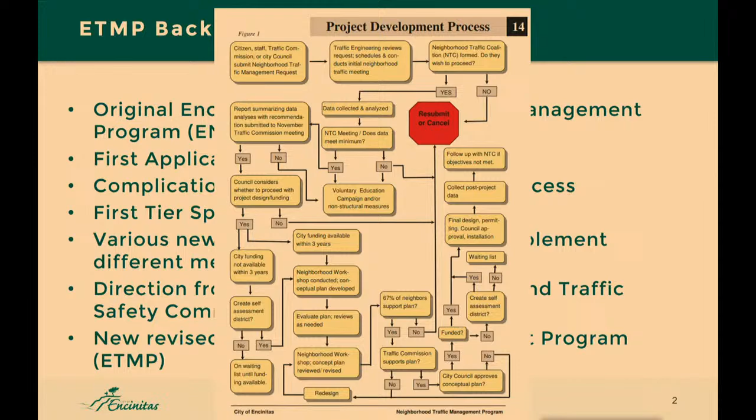A lot of residents were asking for stuff that did not need such a complicated process. It was a very low-hanging fruit type project, but because this was the only program in place, staff had to follow this. So very slowly, staff at the time utilized this program less and less.

Council directed the staff to implement another program called First Tier. Basically, the idea was before even starting this ENTMP, we want to have something to give to residents. And the speed cushion program, the First Tier speed cushion program, was initiated. This had its own flowchart process.

Fortunately, or unfortunately, the speed cushion program was so successful that 10 years after, it was all residents wanted, and nobody really got to a point where they needed to utilize the ENTMP program anymore and go beyond the speed cushion program to utilize other measures in the toolbox.

In recent years, the past 5 years we've been here, we created a lot of new policies: implementation of stop signs, sharrows, blinking stop signs, new crosswalks, mid-block crossings, RFBs, a lot of different policies, and our street lighting policy. And we're utilizing all these different policies.

We have also, similar to what we just talked about, like Quill and Saxony and Vulcan and Neptune, and in a lot of different roads of the city, implemented measures that were already in the ENTMP, just with a different process. So with the direction that we got from Council and the Mobility and Traffic Safety Commission, I think it was 2021, to revisit ENTMP, another one of the things we took on in-house — we didn't hire a consultant again. We did redraft the program.

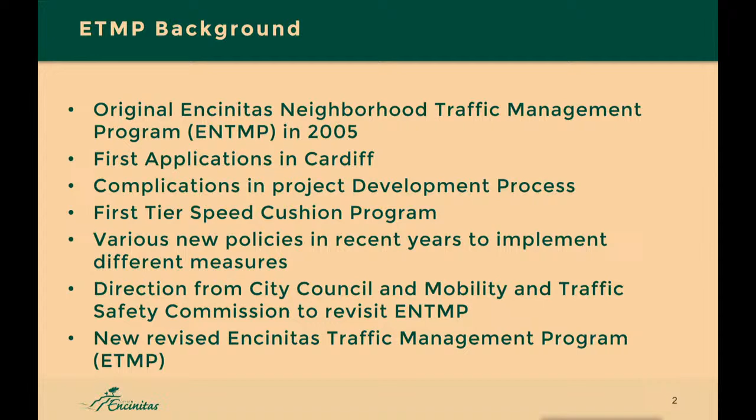I don't want to call it a new program because we had a good program to work with. It's not like we did a whole new program, it's a revision of the old program. We dropped the word 'neighborhood' — I didn't like it, we're not really working with the neighborhood, we're traffic calming wherever it's needed. So the new name of the program is Encinitas Traffic Management Program.

This is the new program that you've seen. It was attached to the council report. I'll just quickly go over what has changed.

So we had a very complicated point-based system. We made it very simple. A resident doesn't have to go through different hoops to get the number of points. It's just a matter of: do we have a speeding issue, do we have a safety issue there? If we have it, then we've got to take care of it. It's very simple to qualify.

We do accept petitions from residents for local residential roadways that are unclassified or classified as residential roads, or streets that qualify. If their speeds are 25 or below, obviously they qualify. For roads that are more than 25, if they qualify as a business district or a residential district, we do allow them to petition for traffic management. If a roadway is classified as a major road or a collector road and does not qualify as a residential or business district—

We created this option for council to authorize traffic calming. In our current policy for speed cushions, for the ENTMP, it only applied to residential roads, but we did add this option. So let's say we want to do traffic calming along 101, like we did 3 years ago — Council provided us direction, and we implemented those as speed tables. Currently, the engineering department is not authorized to implement traffic calming on classified roads, but this option is there for council.

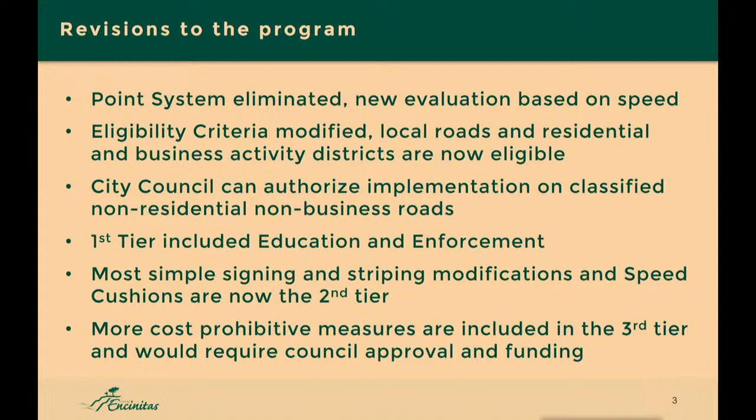These items, due to our funding concerns, the program calls for them to be added to the department's annual work plan and approved by council for potential funding. We cannot promise these to residents because we do not have funding for a chicane. Even if a road qualifies or there's a good design for it, we cannot do it until it's added to our work plan. We can design it, and then the funding is approved by council.

All the new policies from the past 5-6 years that we created for the city are incorporated: the crosswalk policy, sharrows, blinking stop signs, speed radars, new crosswalks, RFBs, all of these.

As mentioned, the third-tier projects would need to be added to the work plan, and city council has to approve them. We don't want to spend time and energy designing something that will cost the city $300,000 before making sure council is on board. So we don't want to spend money on design efforts if it's not supported by council.

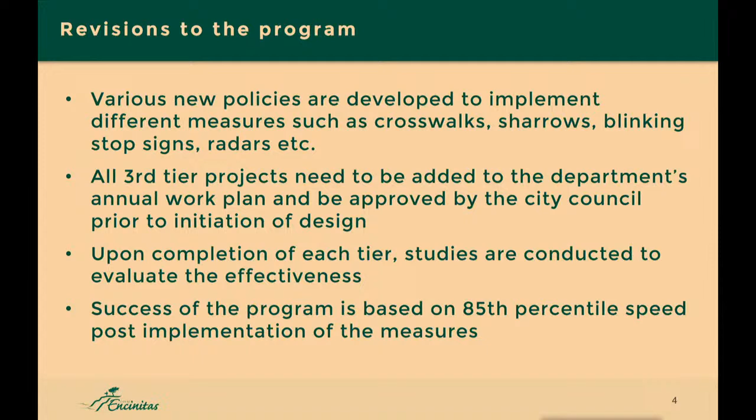That's only for the third tier. If the first and second tier don't work, that's where we come to council with our work plan item. Each tier has studies and provisions in the program that tell us if it was successful or if we should continue adding more measures. The success of the program, similar to the first one, there's no point-based system—if we lower the speed enough, that satisfies us that the program is successful.

These are the measures I mentioned earlier: education and enforcement for first tier; speed limit signs, speed limit legends, sharrow markings, pedestrian crossings, radar feedback signs, new stop signs if warranted, and lastly speed cushions and a speed table for tier two. So our first tier speed cushion program is now the last step of our second tier, to make it a little more complicated for council. Tier 3 is the more complicated and cost prohibitive measures of our ETMP.

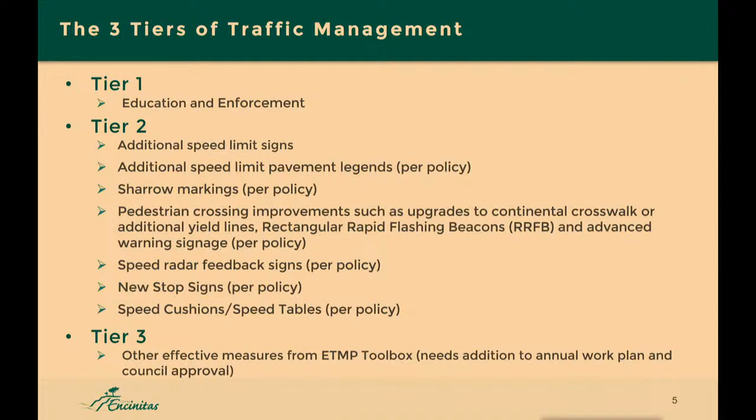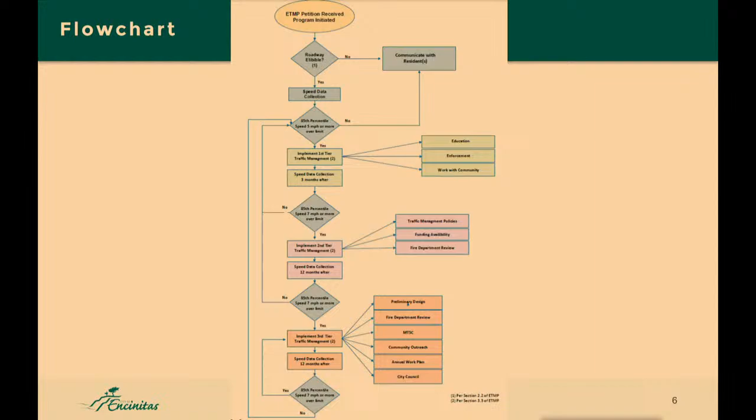This is the program with the three different tiers. Each tier has a checkbox: did we lower the speed limit? If we lowered the 85th percentile speed, the program is considered complete and successful. With that, I'm open to questions. Thank you.